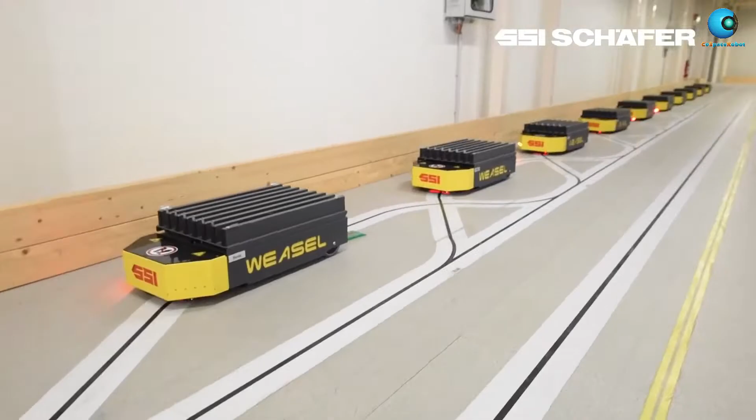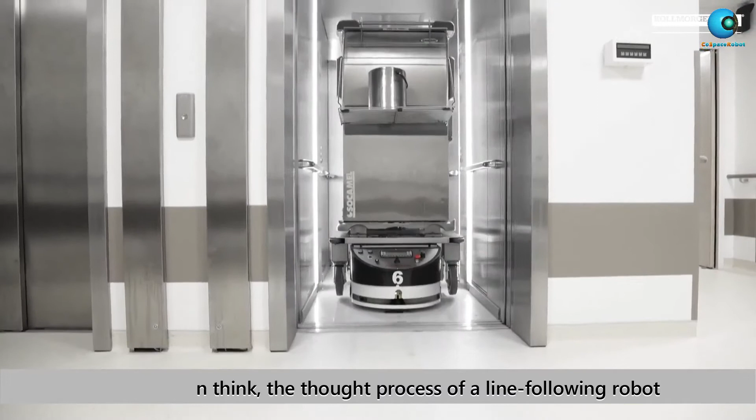Line following is probably the most common application in robotics. It is widely used in industries and even hospitals. If a robot can think, the thought process of a line following robot will be very similar to that of a human being, and that can be simplified into 3 actions: sense, plan, and act.

CoSpaceRobot will give you a unique first-hand programming experience in such applications.

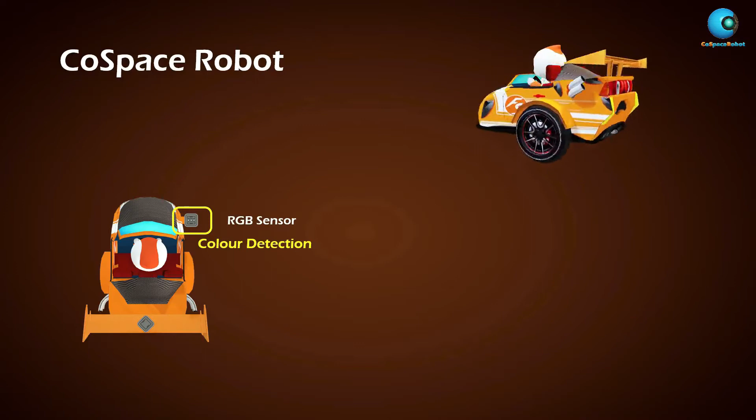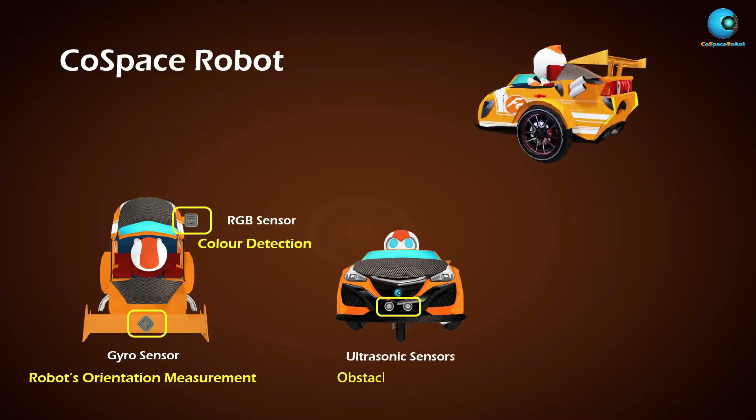Let's take a look at the CoSpace Virtual Robot. It is equipped with one color sensor to sense the floor RGB color, which is a short form for red, green, and blue. One gyro sensor to sense the robot's orientation. One ultrasonic sensor to sense front obstacles, and 6 infrared IR sensors for line tracking.

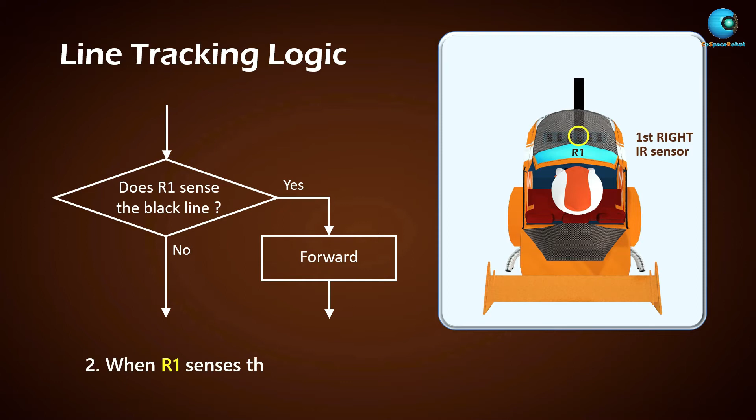What is the logic behind the robot's thinking process when it tracks a black line? The 6 IR sensors mounted on the robot are like 6 eyes of the robot. When the first left IR sensor, we call it L1, senses the black line, the robot needs to move forward. When the first right IR sensor, we call it R1, senses the black line, the robot also needs to move forward. When L2 senses the black line, the robot needs to turn left slightly.

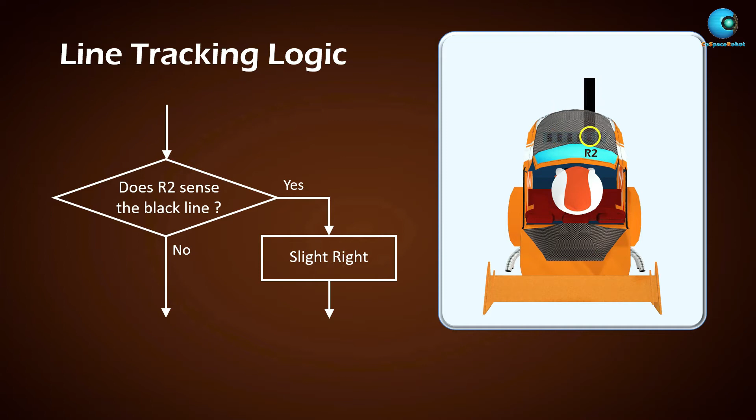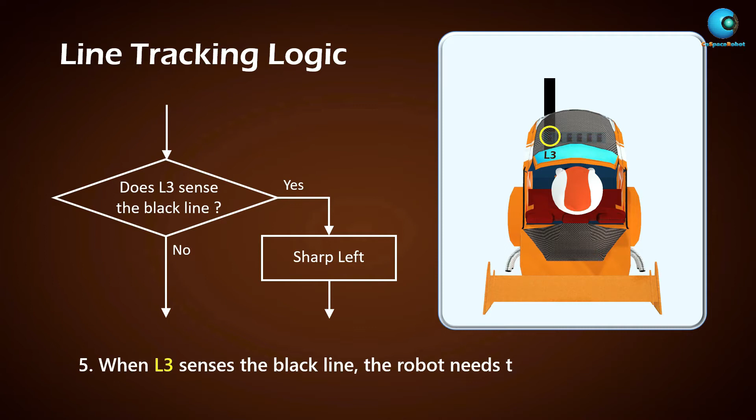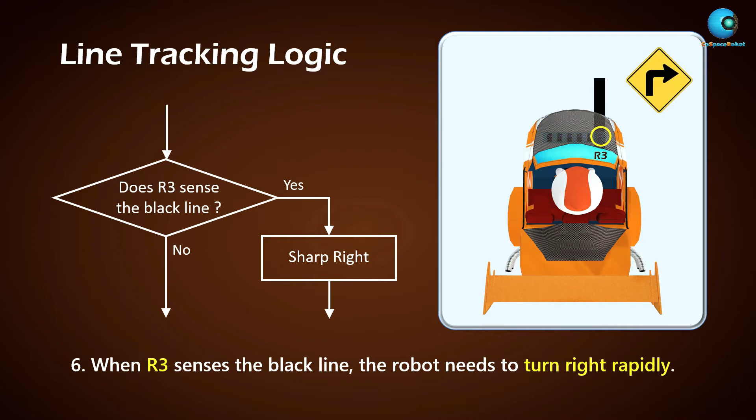When R2 senses the black line, the robot needs to turn right slightly. When L3 senses the black line, the robot needs to turn left rapidly. When R3 senses the black line, the robot needs to turn right rapidly. This process repeats forever in a loop, and this will ensure that the robot tracks the black line.

Let's code a line tracking program in CoSpaceRobot. For optimal performance, your PC laptop should meet the minimum configuration. Let's watch a video guide on installation.

Hello, good job, we are almost there. Let's click on the Experience button to see if our computer is compatible with this software. While we are at it, let's also check the version of our software. It's always good to have the latest version. Awesome, it seems that our computer is compatible and our software is up to date.

And now it's time to activate our software. So there are 3 options: Learn, Compete, and Experience. For this example, we're going to use FirstSteps. Alright, we're going to click on Workshop Pack 1.

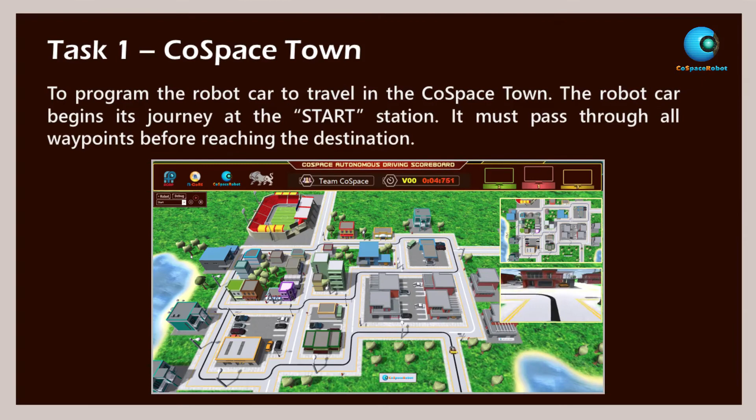Let's work on Task 1: CoSpace Town. You should launch the Task 1 field. The task is to program the robot car to travel in the CoSpace Town. The robot car starts its journey from the start station and must pass through all waypoints before stopping at the destination.

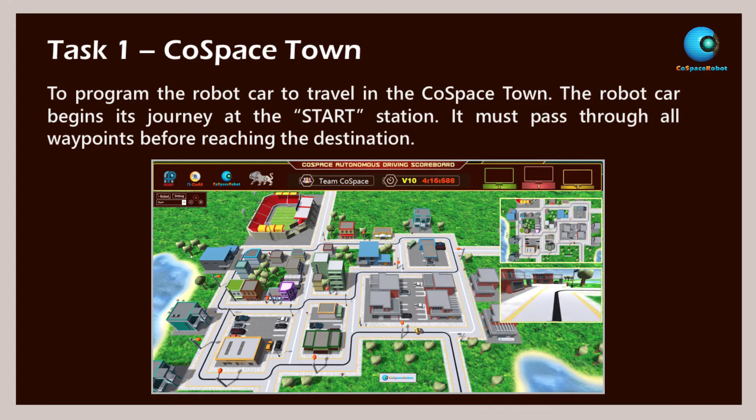To complete the task, the robot needs to track a black line. Let's write a line tracking program. Create a new project and add the black line tracking program.

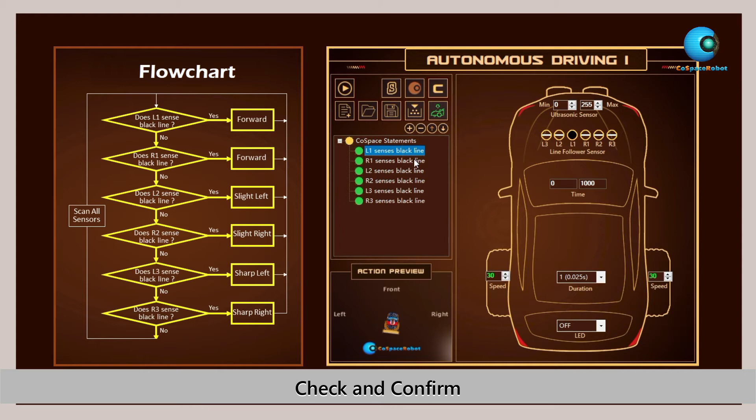Build and trial run. This is the sample code for your reference. I am sure that you can make a better program. Why is the line following program not working well for this line tracking task?

We have to consider the robot's action at two junctions. The first junction is the T junction after waypoint 4. At the T junction, when 4 IR sensors on the extreme right sense the black color line, the robot needs to turn right rapidly.

The second junction is the T junction after waypoint 10. At this junction, when 4 IR sensors on the extreme right sense the black color line, the robot also needs to turn right rapidly. This is the same as the robot at the previous T junction.

How can we make the robot turn 90 degrees? First, we need to specify the speed for both wheels. We set the left wheel to be +10 and the right wheel to be -10. Then we let the robot run for a certain amount of time without interruption. We call this duration, which can ensure accurate turning.

If the duration for turning is too short, the robot will turn less than 90 degrees. If the duration for turning is too long, the robot will turn more than 90 degrees. After a few trials, we found that 1.5 seconds is a good turning period for this speed setting. So we set the duration to be 1.5 seconds.

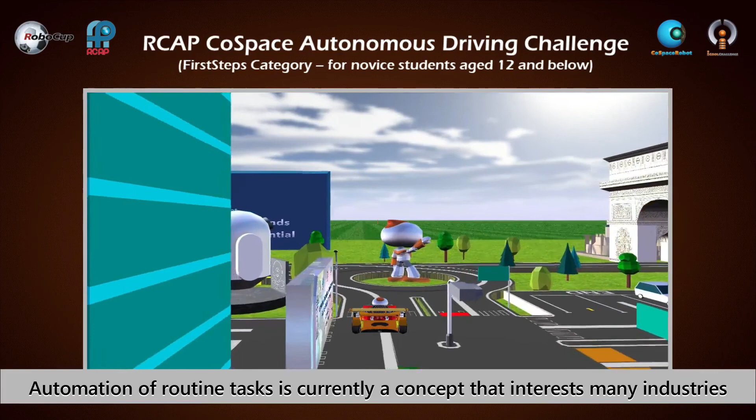Automation of routine tasks is currently a concept that interests many industries. Among the most revolutionary parts of it are autonomous vehicles. These are visions of the future of city infrastructure. The main ideas they all share are self-driving cars and shared mobility, set to revolutionize the ways we navigate through cities.

In CoSpace Challenge, teams are required to build a real robot, develop and program appropriate strategies for both real and virtual autonomous robots to navigate through both real and virtual worlds.

In the CoSpace Autonomous Driving Challenge, students are required to plan an optimum path, code both real and virtual robots to navigate in a smart city. The autonomous car needs to pass multiple waypoints before reaching its final destination. In this smart city, there are roads, buildings, black and white lines, and waypoints.

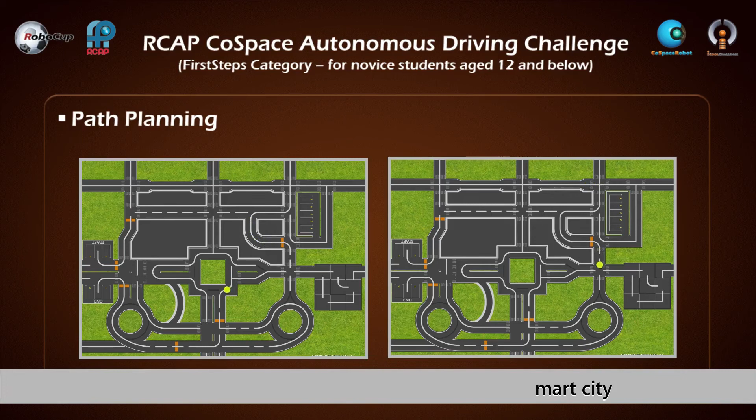In the FirstSteps challenge, there will only be a virtual robot. The robot has an IR sensor array and an ultrasonic sensor. Students need to utilize the elements in the smart city to plan the best path and program the robot accordingly.

Let's take a look at the game process. The duration of the game is 8 minutes. That means the robot has to complete the whole journey within 8 minutes.

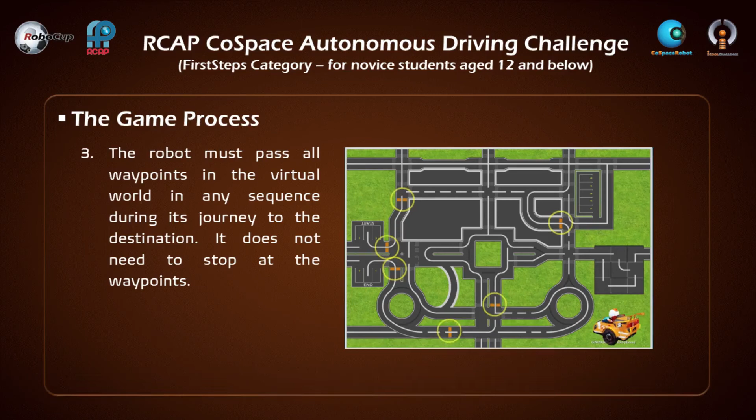At the beginning of the game, the virtual robot is placed at the start station. When it travels towards the finish line or end station, the robot must pass all waypoints in any sequence. It does not need to stop at the waypoints. The game ends when the virtual robot arrives at the finish line in the virtual world.

If the virtual robot passes all waypoints and reaches the finish line, the team rank is determined by the race time at the finish line in the virtual world. If the virtual robot is not able to pass all waypoints, regardless whether it reaches the finish line or not, the race time for the virtual robot to reach the last waypoint will be recorded. The team rank will be determined based on the number of waypoints passed, followed by the race time.

The detailed rules can be found on the RoboCup Asia-Pacific official website.

RCAP Academy is an outreach initiative of the RoboCup Asia-Pacific RCAP Confederation. It aims to strengthen the RoboCup spirit with continuous outreach efforts through promoting robotics and AI to the general public.

On the RCAP Academy YouTube channel, there are plenty of videos on CoSpace Grand Prix, which is the former auto driving, CoSpace Rescue and other RoboCup categories. It includes step-by-step guidance on CoSpace auto driving and CoSpace Rescue, teams sharing, highlighted games, tips and tricks, etc. They are ready for you to explore.

After finishing CoSpace Auto Driving First Steps, you can move on to study more advanced contents in CoSpace Auto Driving U12 and U19.